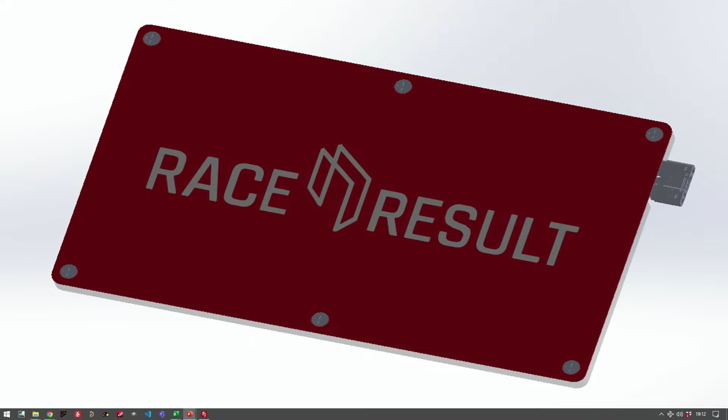Now, what I have with me here today is this thing. This is our new antenna, and there is a reader inside.

It's the same hardware as in the passive trackbox. Obviously, there's no 4G modem inside, and there's no battery inside, but the reader hardware is the same. And what we're doing here, you probably guessed it, we're putting one reader in every single antenna element.

So you would ask yourself, why is this beneficial? Why would you do that? Isn't that expensive? And I can say no, because this is our own reader. We don't have to pay a reader manufacturer for it. And we can produce 6 or 8 of them for less than what we pay for an existing reader if we buy one.

So then you would ask yourself, what is the problem with a reader? Why is an existing reader that you can buy not perfect for this application? If you look at the existing timing systems, there are basically 2 approaches: a 4-port reader or an 8-port reader. And the number of ports is already the problem. All of you know we have 8-port readers, some of our competitors have 2 4-port readers inside. But you have a limited number of ports on that device. And that limits the number of antennas you can connect to your timing device, and it limits the length of the mat you can put on the floor.

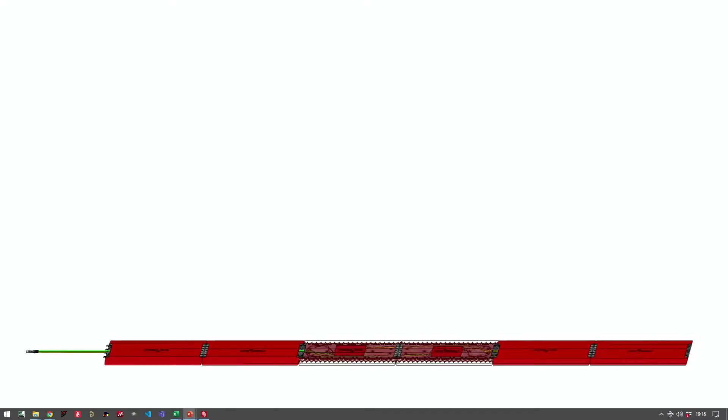Okay, now you have to bear with me. It gets a little bit complex, and I think maybe I'll be moving fast because you first have to digest the idea of having a reader in every single mat. But if you start with that, the question is, how do you actually implement it?

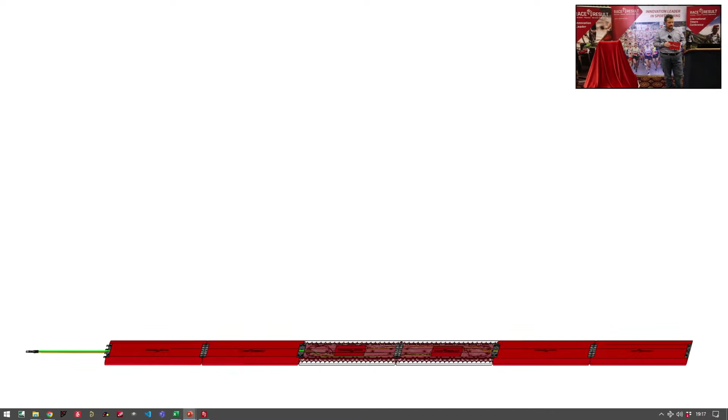So here you see a base model, 6 elements, 6 readers, and I'm going to describe what our new mats will look like. You can see here there is a connector on this side, and there's a connector on this side. So you could start and say, okay, current systems, 8 ports, 8 cables, 1 cable for each antenna. And we could do the same thing here. The antenna does not need an RF cable anymore, it needs a power supply and data communication. In our case, that's 4 pins that we need. But you could run a single cable to every single antenna.

But actually, that's not what we wanted to do. Because when we reconfigure antennas, it's actually quite a pain because you have to take out all the cabling to the spot where you want to reconfigure. So you have to open up all the elements to get all the cables out. And with this kind of technology, that's not important anymore. You don't need the single RF cable per antenna anymore. You can daisy chain them, putting one antenna element connected to the next, to the next, to the next, and you only have an antenna cable between 2 of the antennas.

Okay, you still with me? So one of the problems if you do that is having 8 cables has one small benefit: if one of those cables breaks, you only lose one antenna. It doesn't happen often, but it can happen, especially if you have heavy equipment traveling across the antenna. Things can go wrong, a cable can break. So imagine you have one chain of antennas connected, and that chain breaks. You lose all the antennas behind the breakage. That's not so good.

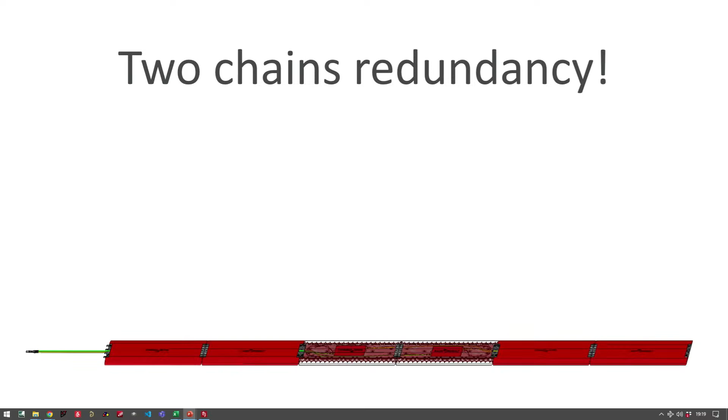And this is why we came up with a solution where we have 2 chains of antenna elements. Now it gets a little bit intricate, but I hope I can explain it so you understand it.

So if you think this through, you understand that if you continue that, you have 2 chains, and if one of them breaks down, it's not really such a big issue. It still is an issue, but you may still have a nice end of your event day because you will still most likely capture most of your participants.

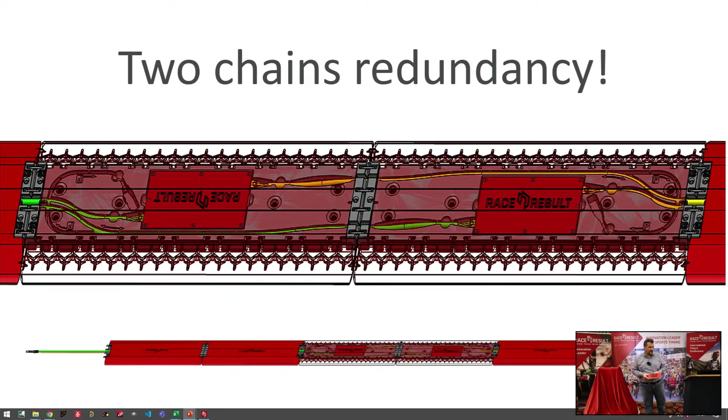You still with me? Please raise your hand if you're not with me. Okay, then I'll go faster now.

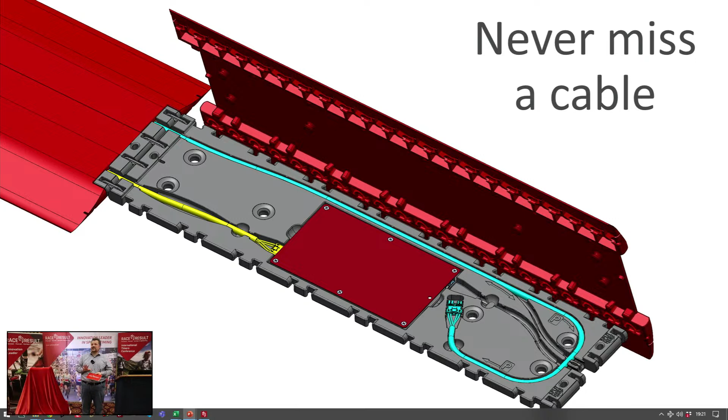So you have this blue cable in the parking position, and imagine you have a second coming from the other side with also this cable in the parking position. You connect the hinges - it's still a foldable mat, that's for sure. So you connect the hinges, and you put that blue cable into the next, and let's say a green cable that comes from the other side into this element.

What you have now done is you connected two facing elements by just opening up those two. You don't need to open up the next one. So you only need to open up two elements to connect elements or split them again. And you always have all the cables you need because they're already in there.

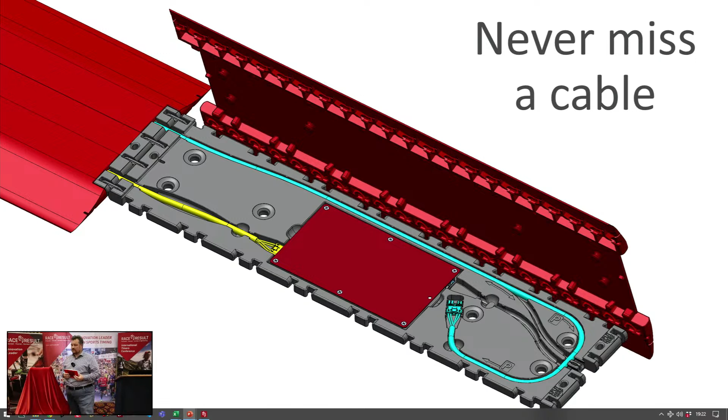So you don't need to bring any cabling. Okay? So this is the concept for our new floor mat antenna.

Talk about sizes. It's unfortunately not really good to see, but we increased the length of one plastic segment slightly, so that now we are at about 2.5 feet, or something like 77 centimeters. Just perfect, so that when it's packed up, it fits on a pallet. Now, that's the important part here.

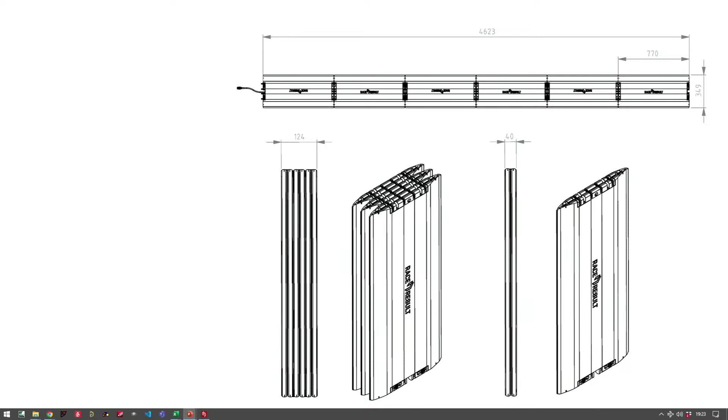The standard antenna will be 6 elements. We think we can get away with 6 elements having the same performance as our old antenna, with slightly further apart antennas, because we can switch on more antennas at the same time. Of course, those antennas will be synchronized to each other, so they don't interfere.

You will be able to buy extension sets of 2 segments. So it's always 2 segments. Maybe if you remember, you have this middle section without parking locations - you should not split them there, it will be a mess. But actually on the plastic it says split here every second mat.

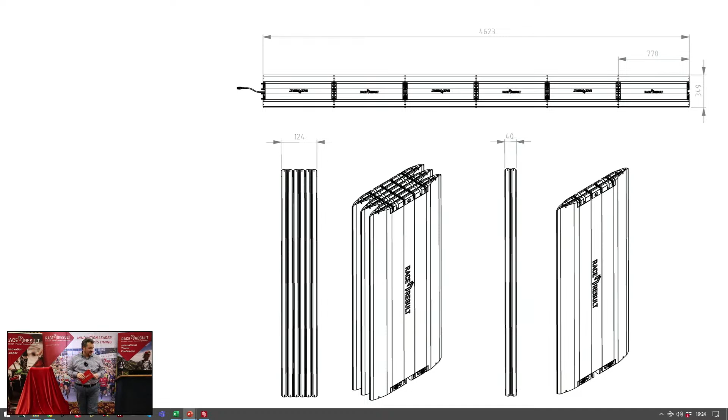And you can expect about a 20% weight reduction at the same length compared to the old one.

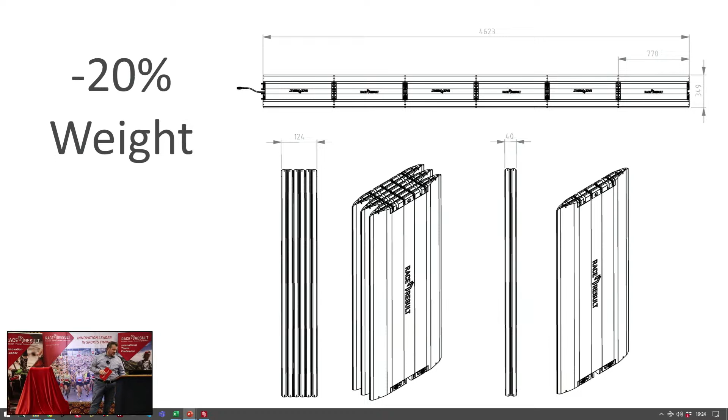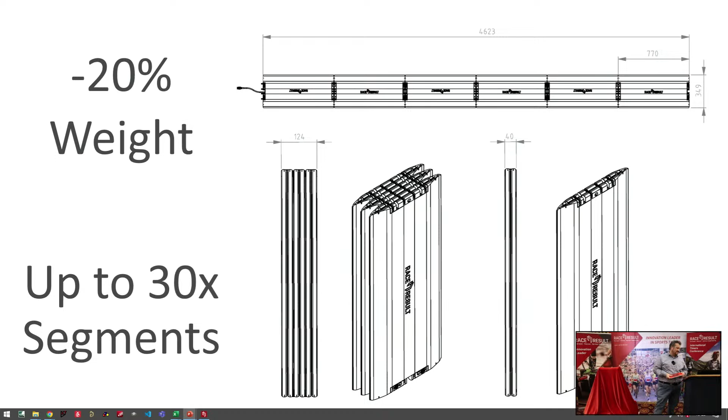So where are we with this right now? Obviously I don't have any plastics with me here today. The reason for that is that with our new form factor being slightly longer, there is no 3D manufacturing company in Germany at the moment who can do 3D prototypes for us in this form factor. So I have smaller parts of it in the office, but I didn't want to bring them.

At the moment, the state is that quite soon we will be doing the tooling for the plastics.

For the electronics, actually interesting part here, this is a picture taken 2 weeks ago in our office with Jonathan and Martin working on the elements. And we have a working prototype. This is detecting 4 elements in a row, connected to each other in the old plastics. And as I said, the actual reader inside is the same as in the passive track box, and we know what we're doing there. Basically, the reader is not the issue.

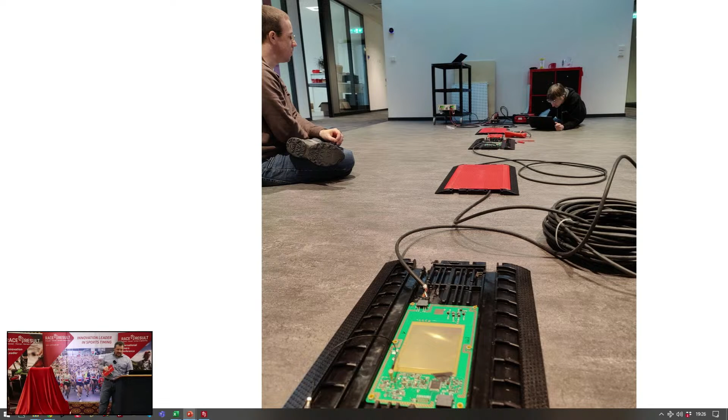What we're working on here right now is how does everything come together, getting the data through, getting synchronization done, and finding out how to actually utilize this hardware to get the best effect or best read rates at the end. So what we're planning is to do lots of testing this summer, and we are planning to have this in the shop late 2023.

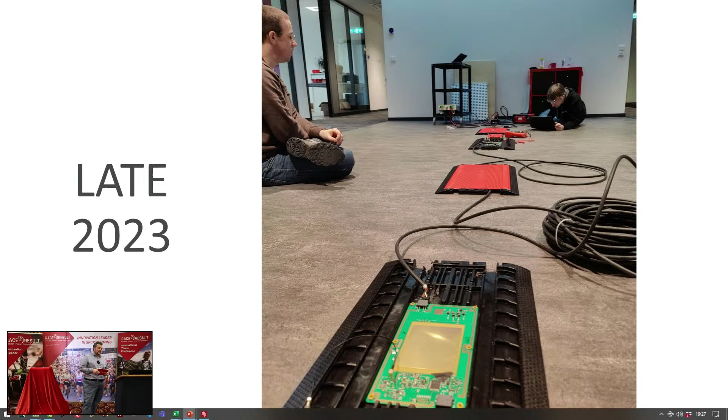Question is, why do I show it to you today? Obviously you need all this detour. What we just did was just the detour to come to this here, because you need to understand why this thing here looks the way it looks. With the announcement now of a product which is basically still, I would say, at least 9 months to go, what we're doing is we're giving you a heads up, which may be important for your decisions this year, depending on where you want to invest in our products, invest in competitors' products. This is why we're doing this today. And I think if we would bring out this product in fall and we would not have talked about it today, you would be pretty frustrated.

So, this was the new floor mat antenna.

Now let's talk about Ubidium. Ubidium is the name of our next generation timing system. And this is what it looks like.

So we were saying that the old housing has been the same for almost 14, 15 years now. And Sönke already said it in his presentation. We now have the volume, we sell several thousand of those boxes here, to do our custom injection molded housings, specifically designed for the purpose. I would say this is the most important part about the new system, that this is a system designed for timekeeping.

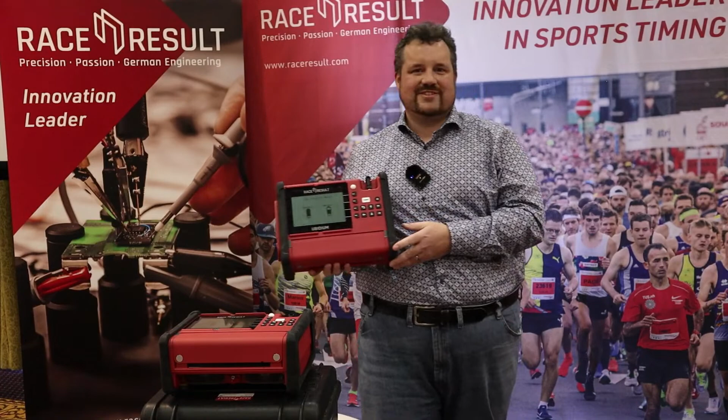Let me show you a little bit of what it can do. I'll have to look for the live stream.

So we were talking about what should be changed and what's not so great about our current system. This new decoder has about a third of the size if you take off the bumpers. You can come up front later and compare yourself. And more importantly, a third of the weight. So I don't know if I could, or how long I could do this with the old system. It would be exhausting.

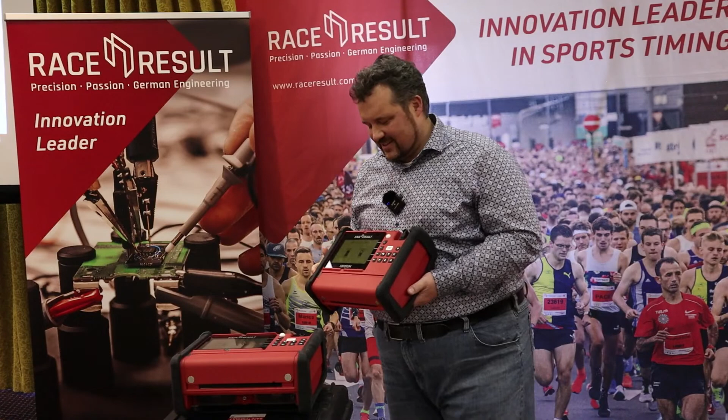So you can already see that the display is showing something, but the system is off. So the system here right now shows you battery capacity of 2 batteries. It shows you a name. Basically here it says 10K finish main. And it just stays like that even if it's off.

Important thing here is that as it's all custom built, also the display is custom built for us. We can do that because power consumption is really low. And we think it has significant benefits to be able to show stuff on the screen even if the system is off.

Now, every person I talked to so far, and I showed this concept so far, told me this is not going to work. Because where is the lid?

Now, the problem is that if you look at the failures that we get for repair systems, if you look at what happened to those systems, in 90% of the cases where we have water damage, the problem was that the lid was not closed and it started to rain.

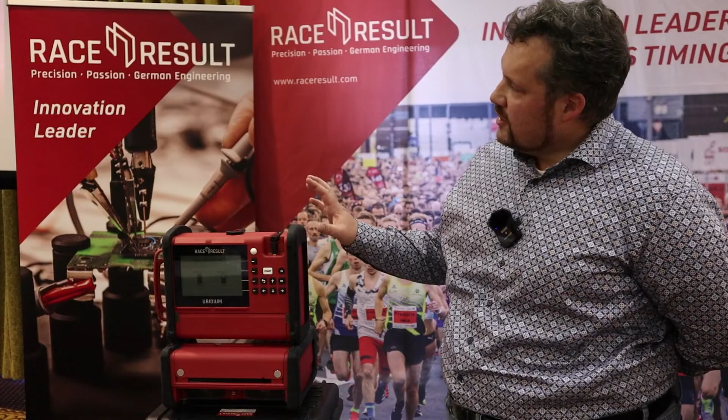So you see this picture here. Obviously, we tested this a lot. And we are quite sure, I mean, you can never rule it out completely, but we are quite sure that we will have less water damage in the future than we had before.

Now, you want some connectors, because you want to connect things. So this thing still has a lid. This is the lid, and there are some connectors below that. And the interesting fact about this thing here is you cannot leave it open. There is no way to leave this open. It just falls back again and again.

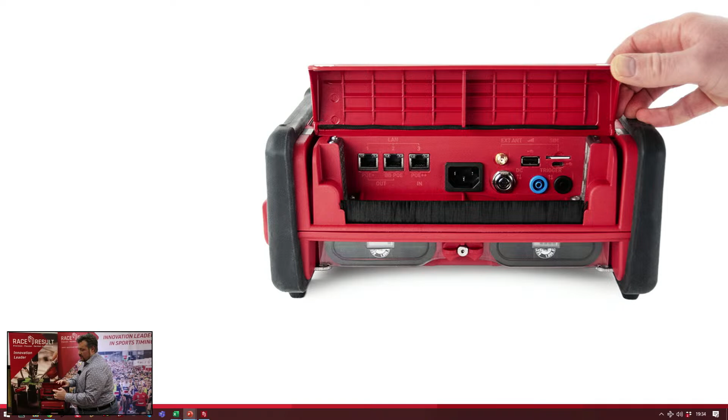There is a brush here, and we'll go into details tomorrow. There will be a technical presentation tomorrow with Moritz, where we actually take the full system apart so you can see what's inside. You will see all connectors populated and the lid still closed, because we have this brush here, which allows cables to go through. And you cannot put a cable in there where water dripping or running along the cable goes into the system. It's just not possible anymore. Because the lid has strong magnets below here, it pulls down your cables, so you will not have water running along your cable.

So talking about connectors, you can see we have quite a lot. I don't want to go into every technical detail here, because we will have another presentation tomorrow, but I will give you a brief overview.

So we still have 4G. We don't have 5G yet. I guess there will be a 5G upgrade in the next years, but right now it's 4G. Important thing is we have 2 SIM cards. There is an external SIM card slot, here, where you can put in your SIM card. And there's also a race result internal SIM card, which can be used if you want. So if you get a data plan from us, you can use the internal, you can put in your external, and the system can be configured to automatically switch SIM cards should there ever be a network problem.

Then we have 3 network ports, of which one is PoE in, power over Ethernet, meaning you can power this thing with a network cable. And I have a PoE injector here. Let's clean up this mess here. So with something like this here, you can power it. And we have two PoE outs. One supplying power when the device is powered itself, and yes, you can chain one Ubidium with the next. And the other one supplying power over PoE from the internal batteries, so you can run your Ubiquiti nanostation or whatever you have, which runs from PoE, with the batteries inside the system.

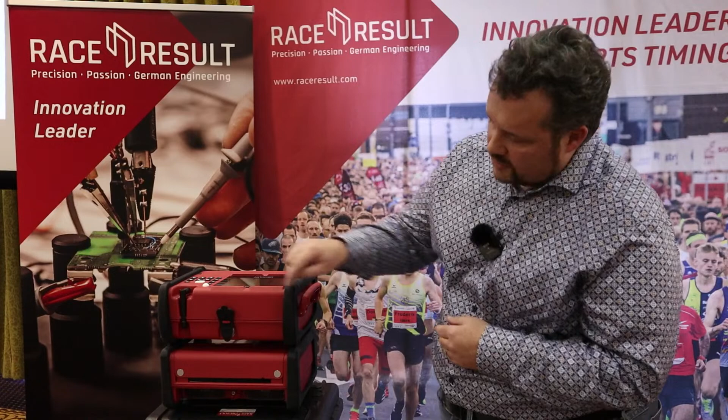You can see there's a second connector down here. This is where the passive mat goes, and I should have a cable here. So this will be the connector going to the passive mat, and you can already see it's going into two cables. That's because of the redundancy issue, going into the two chains of internal elements.

So the active loop will be possible to connect active loops up to 60 meters. It's been one of the big problems of our current active equipment that long loops with high loop powers was not really top-notch performance. So the new system has improved a lot. It depends on local regulations, to be honest, whether it's legal to do that or not. But you can use loops up to 60 meters with 100% loop power.

And as I already said, you can connect up to 30 passive reader segments, giving you up to 23 meters of passive finish line width, start line width, whatever you want to do with it.

Now let's talk about batteries. That's 75 feet, by the way. I hope that's enough even in the States. I don't know, what's the widest start line that you have here?

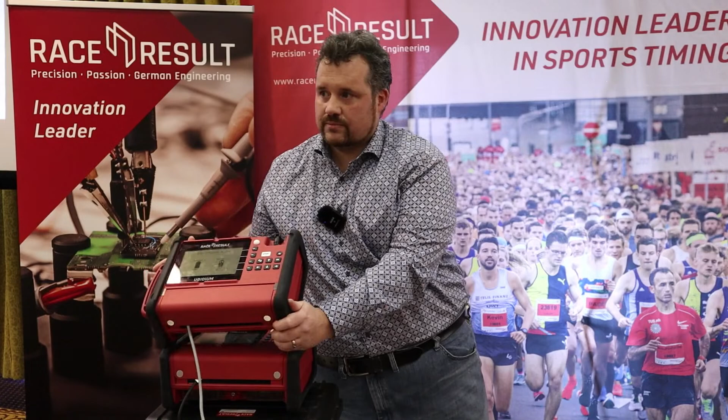The system's still off. You can see how the cable goes through this brush part here, and it's held down by the lid. Same thing here. Now the battery is indicating that it's charging, and it's indicating how long it will take to charge. So with this PoE adapter, it will take 4 hours to fully charge the second battery. The first battery is already full.

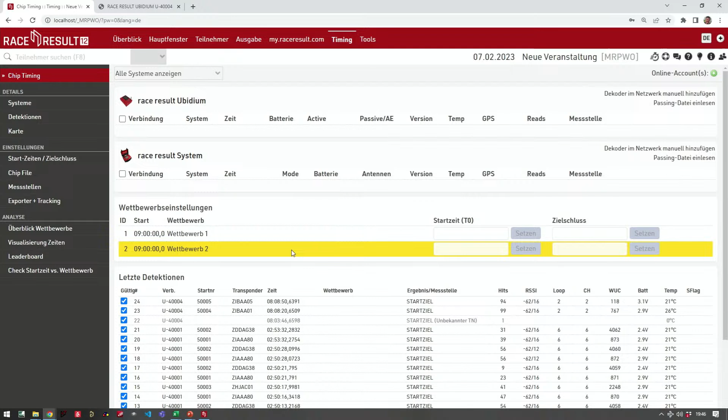I would like to give you a little demo, and for that we have to switch out of the presentation mode. Let's see if that works. So I have a local version of our software running on my computer here, and I will now take off the PoE again and switch on the upper system.

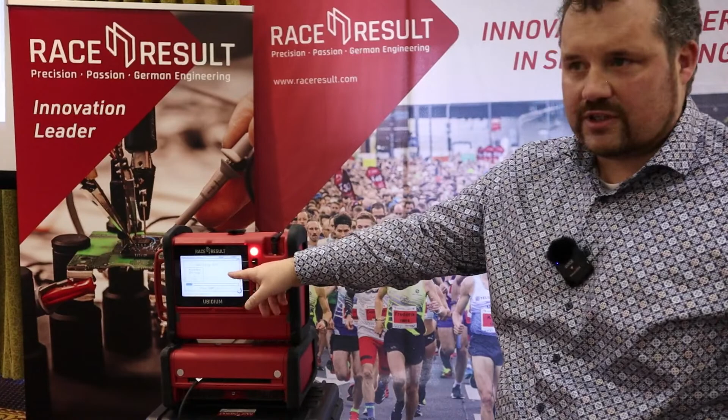One of the improvements, or one of the problems people were telling us about, is boot time. Boot time has been limited by the reader. I'll turn it on and then I'll tell you. So now the system boots. The problem with the boot time of the old system was that we were waiting for the reader, and we couldn't be sure the reader would be operating before it had booted. The Zebra guys had never optimized their software for shorter boot times, because in a warehouse situation this does not matter, but in our situation it matters a lot. To be honest, I didn't see when it was finished, but when the light came on, it was finished. So it took about 20 seconds to boot.

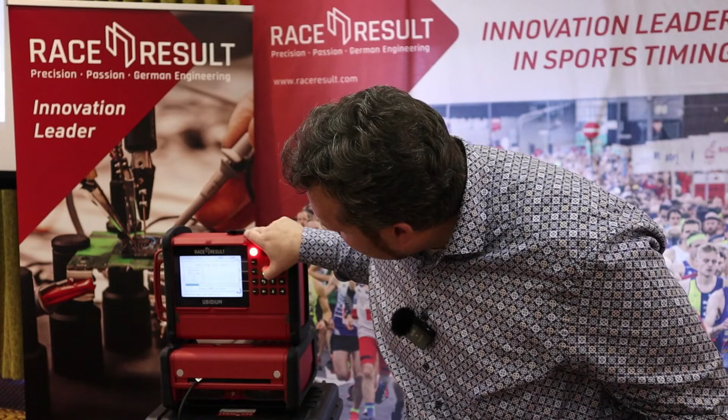It is now searching for GPS, probably won't find one here. I'll press this button to have it finish searching for GPS. Let's see. And you can already see the system popped up in my timing software.

So how can this be? Actually, the system is running an access point, Wi-Fi, and my computer is connected to that. Let's see. So here you see there is a U40004, which is this ID here. My computer connected to that, and now I'm connected.

For many small events, this is going to be the setup, because if you can run on battery anyway and rely on the battery, you don't want any cabling. And if you have Wi-Fi data communication between your computer and the box, you don't need anything else. 20 meters is the range of the built-in Wi-Fi.

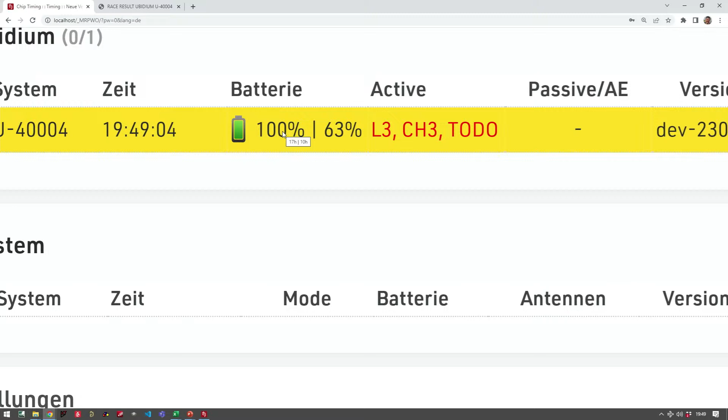So you can see up here, we have one battery at 100% and one battery with 63%. One battery would now last... oh, you can't really see that here. Let's see if we can make it bigger. Unfortunately, that does not get bigger. So it says 17 hours and 10 hours, as far as the battery life goes.

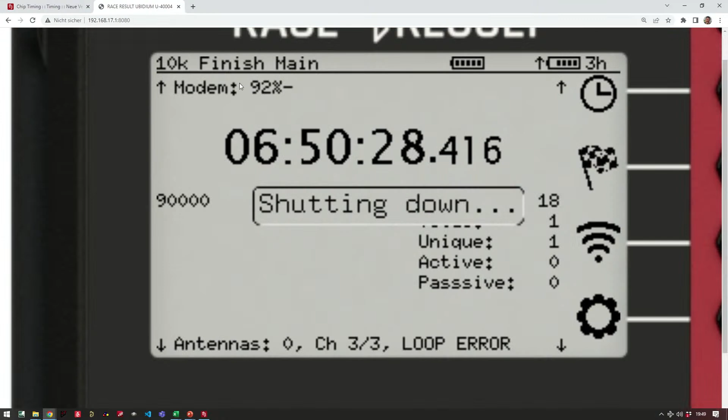So to show you some details on the screen here, I have a second tab. Let's see if I refresh that. So what you can now see is what's displayed here on the screen. Probably most of you already know that from our old system. Basically the same thing — if you have a network connection to it, you can directly see what's on the screen.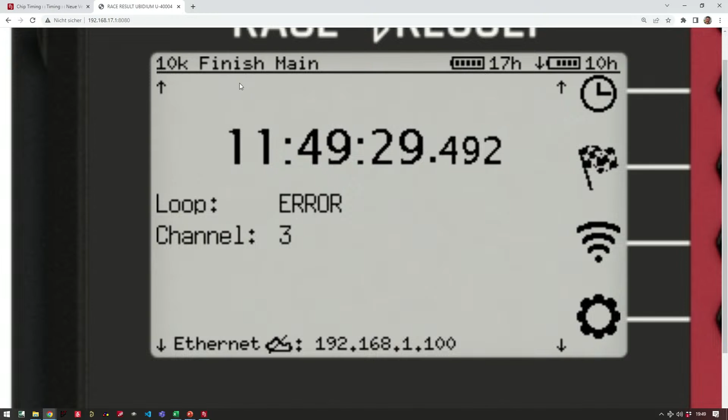Actually, here in the web interface you also have the buttons. They're not labeled yet, they will be at some point. You can press the buttons here and remotely control it if you want. So what you can see here is that this is the 10K Finish main system, same text as was on the screen when it was off. We have one battery with 17 to 18 hours left, and one battery with 10 hours left, which is currently discharged.

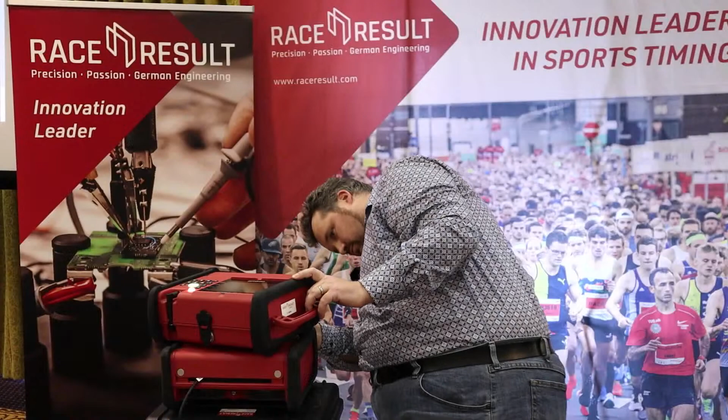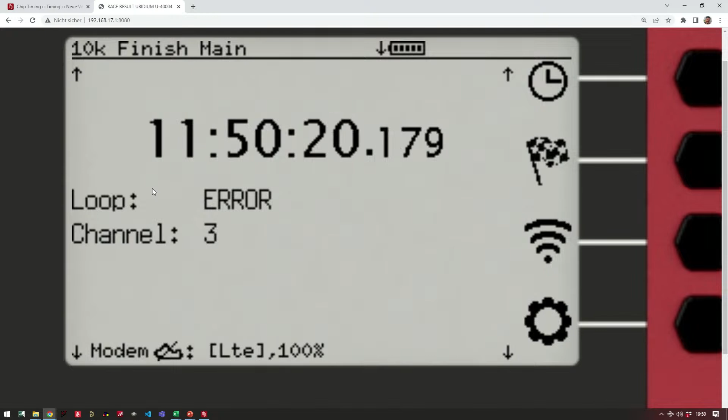So what I will now do is remove the battery that the system is running on right now. The system still runs and is now operating on the first battery. It will take about 30 seconds to estimate how long it will last on that one. It should hopefully come up with 18 hours again. Put that back in.

Now, just to show this, I will connect PoE again. And it should charge—so now the arrow moved up. The other battery does not charge right now because it's already full. Hopefully within 30 seconds, there should be the hours remaining to fully charge it.

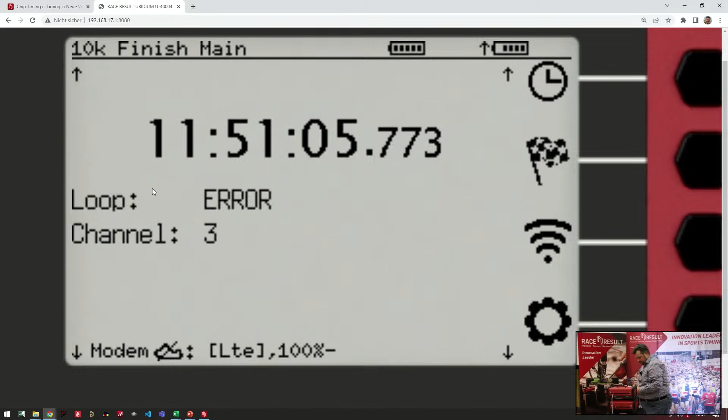So now I will connect a loop to get rid of that loop error. Turn it around. See if that works.

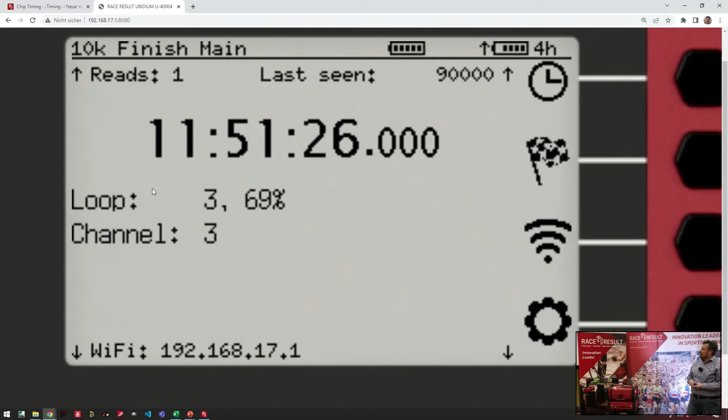So you see it's running loop number 3, channel number 3, 69%. And currently it has one read, which is because I pressed the start button at the beginning, creating a marker. I can switch through 3 different screens.

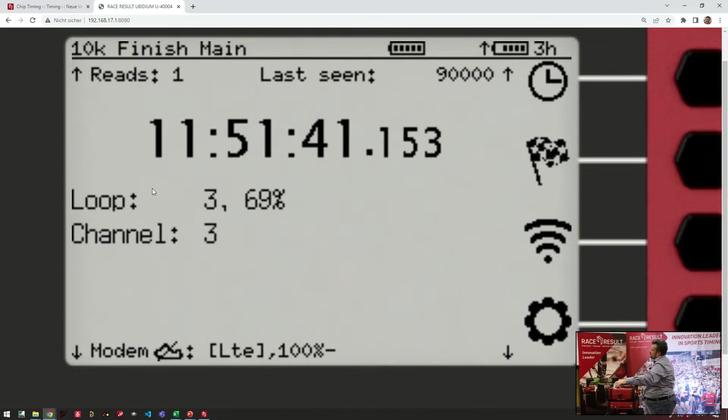The next one would be this, showing a condensed version of what timing is doing, but also the Ethernet connection, Wi-Fi, and modem. And the last screen showing statistics that many of you wished for—the passings received.

So I hope something happens here. We have some passings coming in, and you can see now it's total 4, unique 4. Let's see what happens—total 7, still unique 4. So that's what the screen looks like.

To be honest, I'll invite you to play around with it. We have 2 systems here. Doesn't really make sense to go through the menu in this presentation. I would like to remind you that this is still in development, so things on the user interface may change. The physical layout of the buttons won't change anymore, but the user interface may.

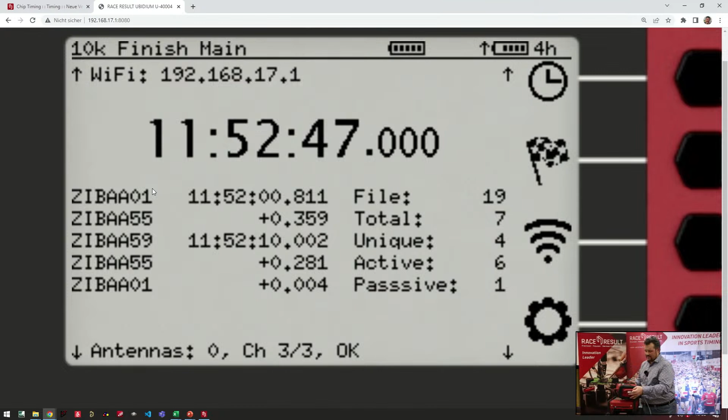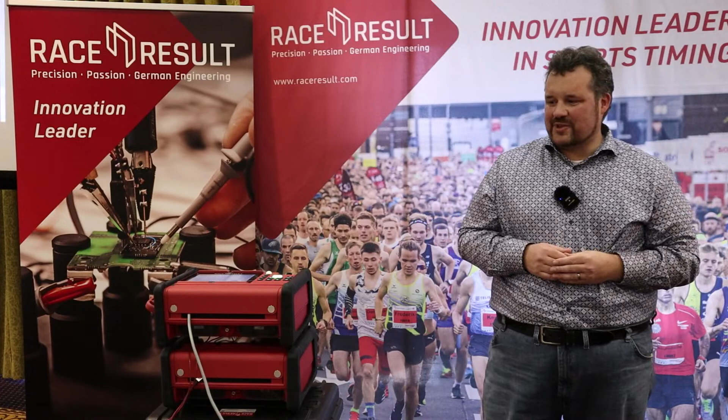So I would say this was basically all there is to say from a top-down perspective. Tomorrow there will be another presentation where we really will take one apart with a live camera. You'll see what's inside and see that every single PCB in there is custom made. You'll see some nice details like the battery heater, the humidity sensor, and all this other fancy stuff that we have in there. But I think it's enough for this presentation.

I had a last slide, which might be important. So the question is, when will this be available and what does it cost? As an active system, we are planning to have it available mid this year. And the decoder as an active system will be priced quite similarly to our current system, because you may think, okay, this is expensive, but actually it's not.

I don't have pricing for the passive solution yet, but we will align our pricing for all the different currencies to our existing pricing of the existing decoder. It will be slightly higher—we have to adjust for inflation—but it's not a completely different league.

Yeah, so that was the presentation of the Ubidium timing system. I hope you liked it. If you have any questions—how much time do we have left for questions?

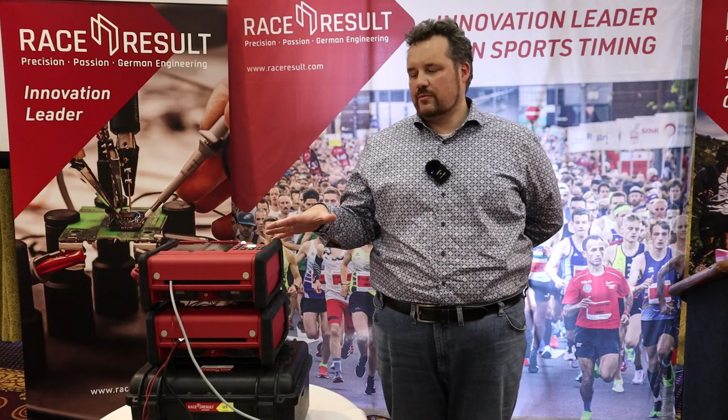Okay, that's two questions. So button lock—I think I know what you want. Interesting question here is, it doesn't have a lid, and we already talked about all the stuff concerning weather, but you may be concerned about people playing with it. This may be interesting to people, and yes, I can understand that. But to be honest, I have two answers for that question. The first is I've been to quite a significant number of test events now with this system, and I intentionally placed it somewhere where spectators and everyone could go and watch what happened, without standing next to it. People are interested, they look, but so far at none of these test events has anyone dared to touch it. So that would be the first answer to it.

Jenna is shaking her head, yeah? So yeah, wait.

So the next answer is yes, there will be an option to lock it. The idea at the moment is that you will have some key combination that you have to press to unlock it. So you can tell your helpers press 2 times down, 2 times up, or whatever, and then you can do something. And if you don't do that, the system won't react.

Problem there is that still, if somebody wants to be a bad actor, they can just take the system away. And this was already possible with the old system, or disconnect any cables. Now, the question to you would be, on how many events of any one of you have you ever had the issue that some random person disconnected your antennas? Okay, 3 or 4. Okay, so unfortunately, this is something we will not be able to fix.

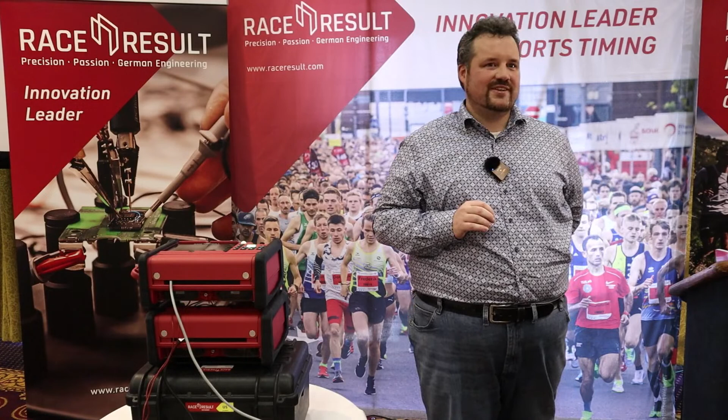So I guess that the next point is you're putting all this effort to it. I think it's amazing, don't get me wrong, but we're going to break stuff. Yep, we're going to figure out ways to break stuff you didn't think we could do. Yep, that's possible. Yep, I don't care whether it's a screen or the whole upper. If there's a program where we can buy those parts, it takes the hassle away from you and from us. Yeah, but you have to consider one thing.

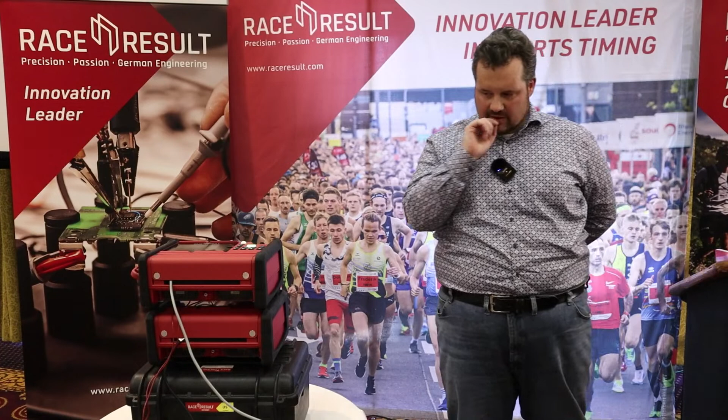This thing, you can take the batteries out, and it then only weighs 3 kilograms. So sending around the system will be a completely different story from the old system. It's still shipping time. Yeah, Boulder is fast, but they're only so fast. Yeah, they're still waiting for the parts. It's a huge different ballgame when it breaks on Sunday, and I need it on Sunday, or Saturday, or Tuesday, or Friday, whatever, to go to the next event.

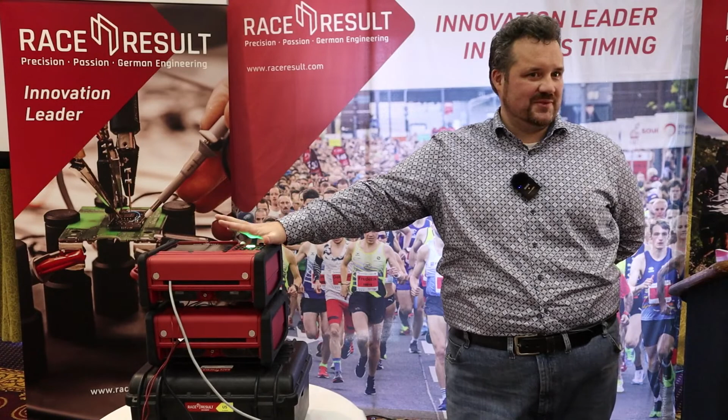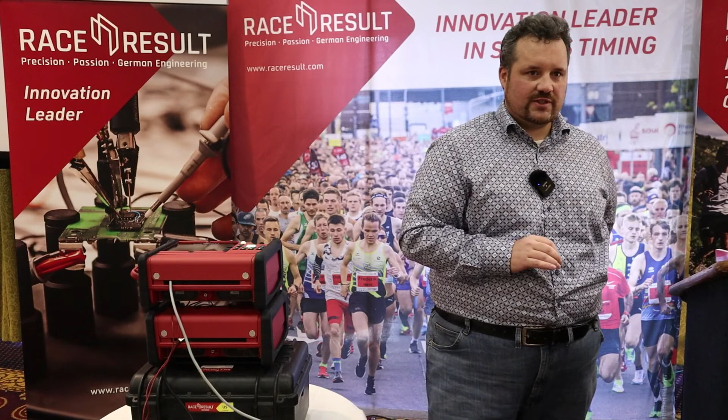Well, but then you would already need all the spare parts. I mean, I would recommend in that case to have a backup system. But yeah, I get what you want to say, but I don't want to promise here now that we will have a- to give you our wish list. Yeah, what I can say, I don't know if anyone had ever had a problem getting spare parts from us. Typically, if you contact us and you want a part for the old decoder, I'm talking about displays, for example, it's not been a big issue, but we would have to discuss the case.

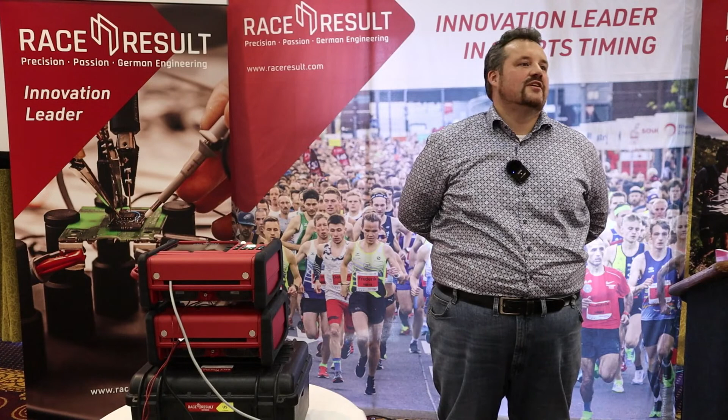Can you just go over the specs of the PoE? Is it PoE plus? Can it have the new PoE, what we're all running—honestly, if you're not, it's Starlink, right? It's 48 full volts. Is that even an option? What's the output of PoE? So it has PoE out. There's lots of different versions, PoE from 12 to 48.

I wanted to repeat for those on the live stream, because I'm not sure if they got it. So the question was, what's the technical specification of especially the PoE out? Is it PoE plus, PoE plus plus? What's the voltage?

I guess Moritz may also talk about that tomorrow, but the technical specifications should be shown now. But Nikias, you can also take over—yeah, that's what the technical specification of the PoE out is.

You just said Starlink. I have no idea what the power supply requirements for Starlink are, but I guess it's probably higher. There's a lot of power—30 watts out is a lot of power.

So the higher output power is when the system has power itself. And the low power PoE out, the 15.4 watts, is coming from the battery of the system. This should be enough for your typical Ubiquiti Nanostation setup.

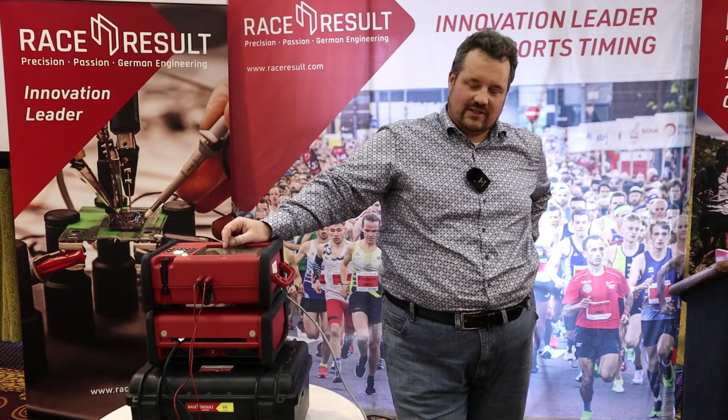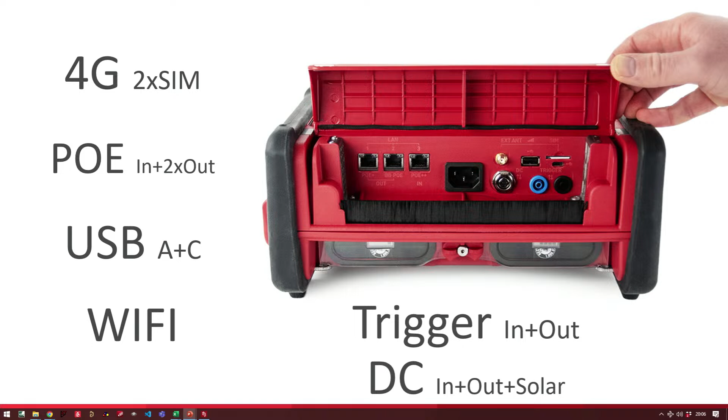So, can't really see it, but here on the left and right, you see two metal plates next to the connectors. Let me open this up again. You see this metal plate here, and there's another metal plate on the other side. You see that?

If you look closely, the broom does not really touch the lid here, so there are gaps below. The number one reason this thing could heat up is because you connect it to mains power, and the power supply inside is our largest heat source. In the lid there's a plastic piece, and there's one down here. When you connect the AC connector, it blocks the two halves of the lid, so air can be sucked in by the fan, pushed out here, and go down again. This way we made it waterproof, but there's still some ventilation.

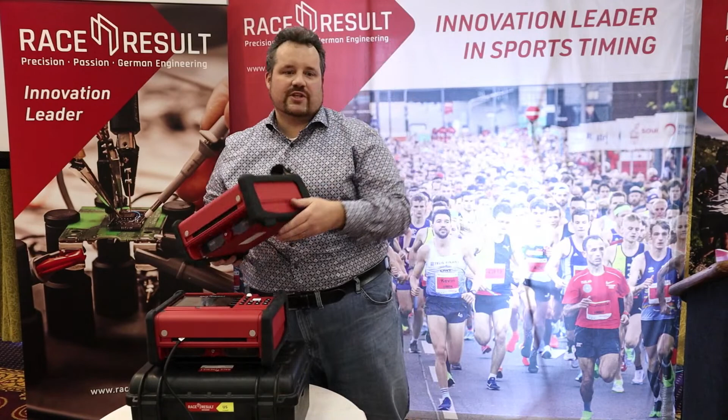We at Moritz did some tests. We have an artificial sun in the office with I don't know how many hundred watts of light, trying to heat this up. One thing that can happen is that power supply ratings may be derated by the system if it gets too hot, so it won't charge as fast.

But we think we are set up much better than with the old system. I live on a coastal area, we do a lot of things on beaches with salt and sand intrusion into things you can't cover, like blowing sand getting inside. I'd say not through the front. If you open the lid and throw sand in there, I can't help you.

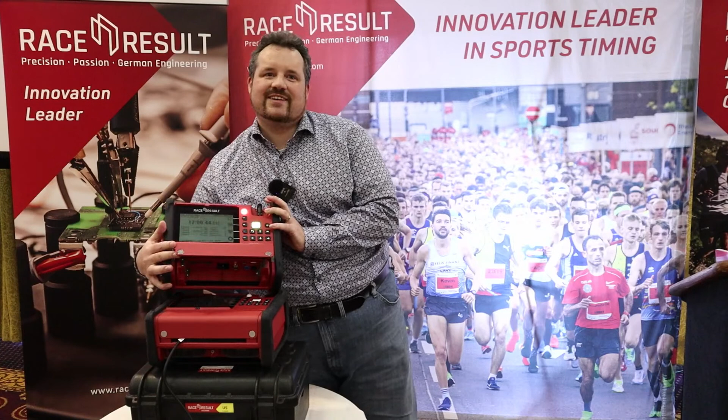On the side here there is actually a filter, so where it's sucking in the air there is a filter which can be replaced by you if you want. There's a screw you have to take out, and you can replace it. It's like the filter in the back of your vacuum cleaner, so dust doesn't get into the system. But obviously you can break it if you want to.

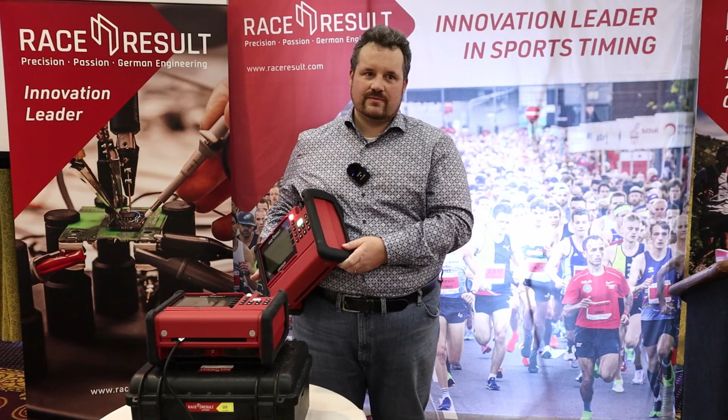I don't want to. Yeah, but going back to it, my staff. There were some other questions before, Jenna. I think I forgot your name.

I had a question just about the mat. In some of the road races we've done in the past, cars drive over it, or during prep we've had a logger truck drive over several of our mats. So the question is, will it be durable enough to let cars and trucks drive over it? With the current mat, did you ever experience any issues with that?

We get a beep if something goes over that is too heavy, but it never affects us - that's the design goal. You are touching an interesting problem because we have significant electronics in here. Actually, I have a screwdriver to open it up, if you're interested you can have a closer look. There are electronics in here, and there definitely is a risk of this thing failing. I'd say the risk is higher than with the old solution, because in the old solution, the antenna, there wasn't really something to fail in the antenna. But it's been on our to-do list for the last 3 years.

Will there be a warranty with any of that, or are you going to assure that those will be good for X amount of years? I would say we will have our standard warranty times which apply for this product.

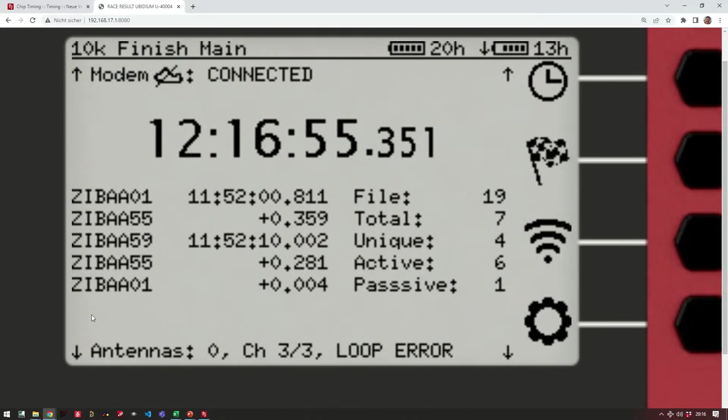Maybe go back to this here. You see up here we have these 20 hours and 13 hours. One of the major design goals was that you can trust those numbers, because that's a major pain point on our whole system, that you never know how long this thing is going to last.

So we think we will be much better with this, and these numbers up there take into consideration the actual current consumption, the current state, and the battery state, so temperature and wear and tear of the battery. So an older battery will show a lower number.

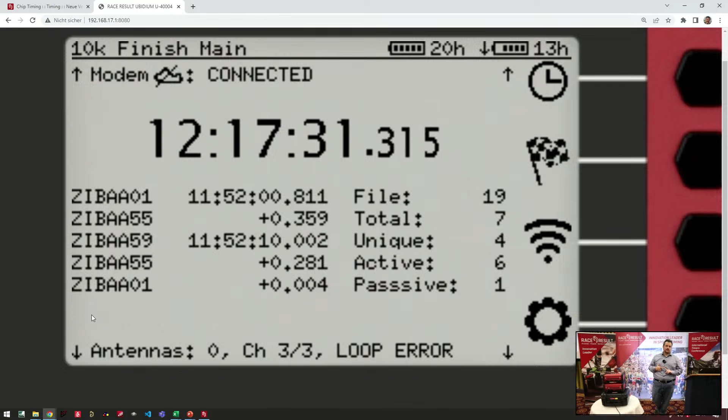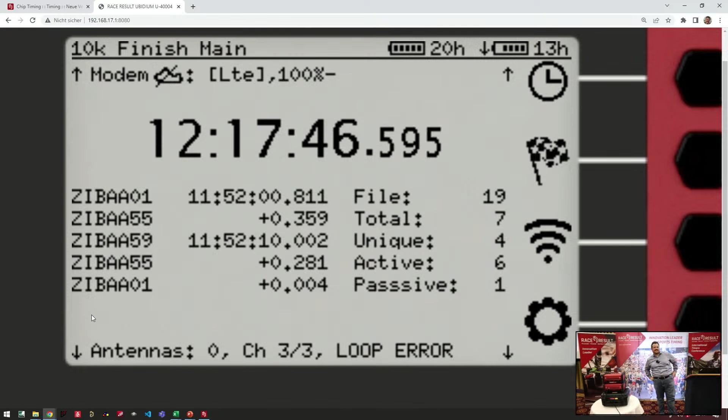Is there going to be some kind of trade-in replacement for the old ones to these ones? Yeah, so the question was about trade-ins of old equipment and getting some new equipment in return. I see this as a good sign because it means you're interested in it.

To be honest, it's not decided yet. We have already discussed internally. The major problem is, what are we going to do with all this old stuff? Maybe you find somebody else you can sell it to. That would be... but yeah, we'll see. Maybe I don't want to promise something. So as it's not yet in the shop, before it will be in the shop, we will let you know. By then it will be decided.

Yeah, go ahead Chuck. If you have that screen running, can you quickly demonstrate the screen backlight? What do you mean here? Press... yep. The question was on the screen backlight. Yeah, actually I go into display brightness. You can adjust that.

Because on bright light days, reading status and commands is sometimes difficult. Yeah, but actually an important factor about this display is that it's a transflective display. I mean, you may ask, this still looks like old technology. Other timing systems have LCD color displays.

It's actually interesting because I've missed that in my presentation earlier. Something for me to tell tomorrow. Okay, sorry. But I will tell you some specs.

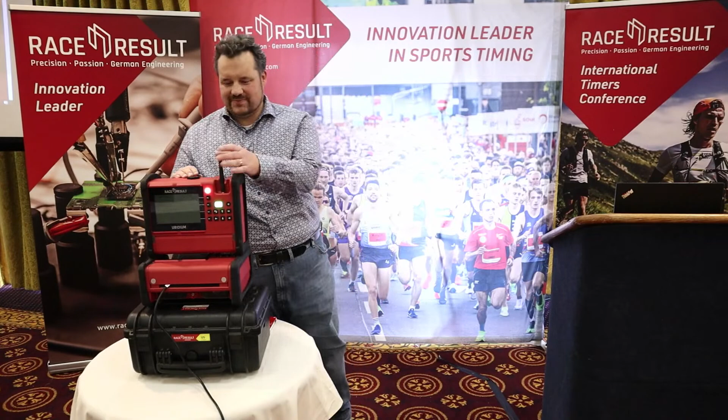Okay, yeah, so some of you may ask, will I be able to connect an active extension? So there are some sports, especially skiing, downhill skiing, where you don't want to put this box next to the track because it's just not allowed, because it's too big.

Yeah, so there are some applications where you still want the active extension to be close to the track, where the active extension is actually something good. And that's why we decided that you will be able to connect the active extension to this connector where you can normally connect the passive mat.

There are some niche applications where it will even be possible to have both the internal active system and the external active system running at the same time, connected to that connector. There will be a new cable, so existing active extensions will be able to run on this connector. That gives you two channels. Wait for my presentation tomorrow and see why this will be important.

Question from Mark Courtney: when configuring your mat setups, is a mallet necessary to close up your passive mat like the old one? The connector between the bottom and upper half has completely changed, and one design goal was to manufacture these antenna mats during the daytime, because currently they're only manufactured at night since hammering them together is so loud you can hear it throughout the building. So yes, you will be able to put them together without any tool. That's what we're aiming for.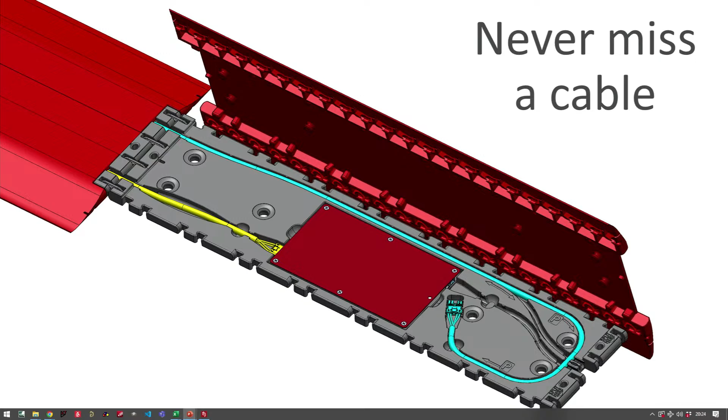I have a question: what if I have a technician who gets everything wrong and wants to set up the system so the cover part faces up towards the sky? You already know the answer, that's why you're asking it. I'll just show you. I have to get all the stuff off the desk to show what he's asking. So I'd say that wasn't really a question, that was him wanting me to show you something. How do you prevent that from happening?

Final question from Aaron: can you activate track ping and receive track ping on that one? That's something for tomorrow. So please, if you're interested in active transponders and track pings, attend the presentation tomorrow. For all those watching live on YouTube, you'll know the answer soon, but for those of us here in Boulder, join us tomorrow afternoon and you'll know more about it.